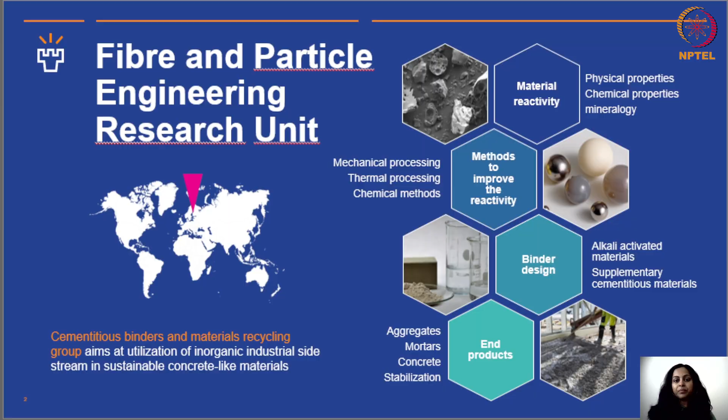Contents of today's presentation is about sustainability and circularity in construction, and then I will explain construction and demolition products, recycling concrete, and some pre-treatment methods already existing in this type of material. The main focus would be recycling fines, which can be in high value application or high volume application, which I'll explain in later slides.

And then we will touch upon the findings from these studies and what could be done as next steps.

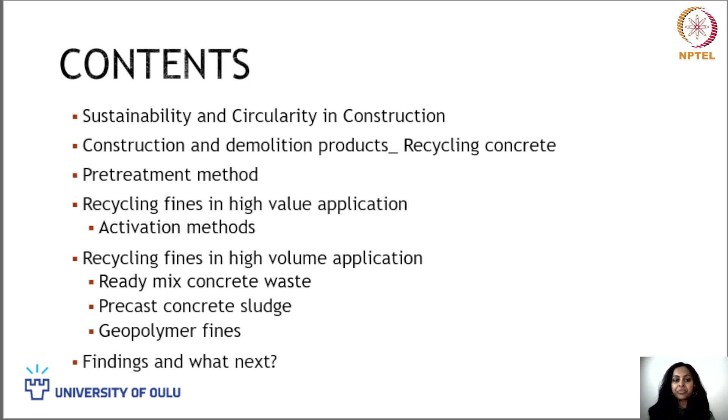When we consider sustainability and circularity in construction, it is heavily emphasized in recent days. Before going to the broader picture, let's see what it means in definition. Sustainability is defined as meeting the needs of the present generation without compromising the needs of the future generation. So it stands on three major pillars: economic, environmental, and societal.

In most cases, construction materials depend on natural resources, for example minerals mined, rocks, sand, wood, and so on. Creating sustainability in this kind of environment, when material is heavily dependent on natural resources, we should rely on the 3R principle, which is reduce, recycle, and reuse.

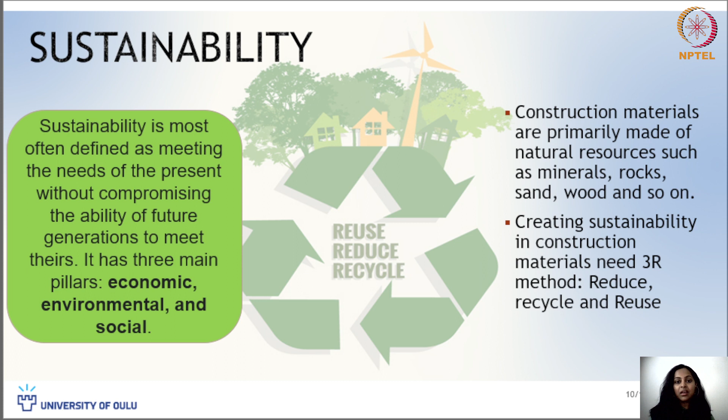Coming to circularity in construction, it is mostly defined by knowing the end of life scenarios. This picture shows how it looks for construction materials in recent days. If you consider steel on the right, you can see it is almost 93% recycled, 6% is reused, and only 1% goes to the landfill.

Coming to concrete, 75% is downcycled, whereas 20% is recycled and 5% goes to landfill. Considering timber, almost 58% goes to landfill.

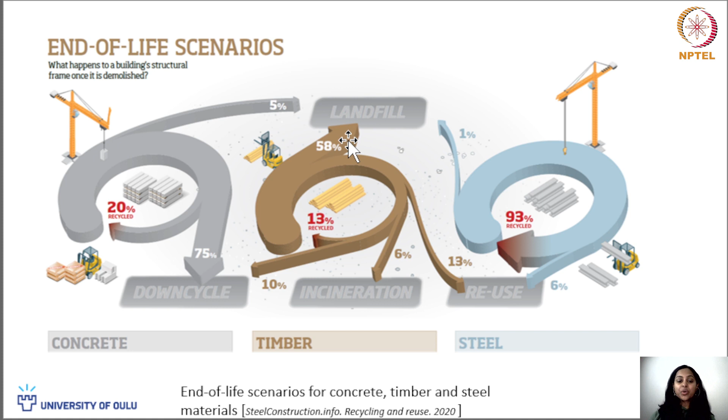So what we learned from the past generation is we had an abundance of resources, wherein 100% of raw materials were used from natural resources. We made buildings, and new buildings were formed also in the same way, whereas old buildings went mostly to the landfill, and we never knew how much material was reused, recycled, or recovered, because that was not the main criteria in the past, since we had enormous raw materials.

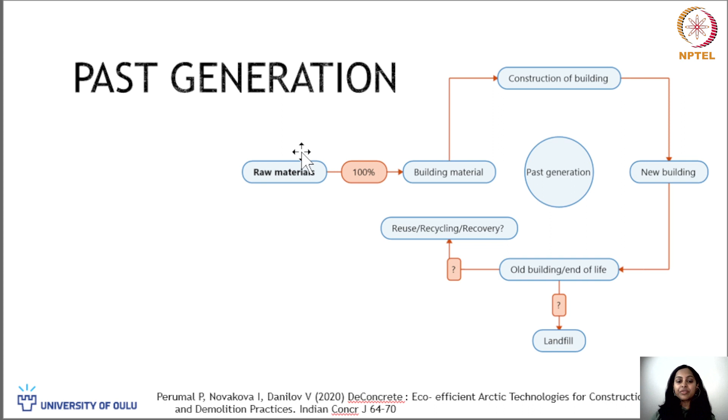In the present generation, when we feel the heat of so much natural resources already used in the past, and we need this sustainability to be maintained for our future generation to have their own resources, we are emphasizing so much on secondary raw material usage, which should be a minimum of 70% according to EU regulations, specifically the EU Waste Framework Directive, coined in 2008.

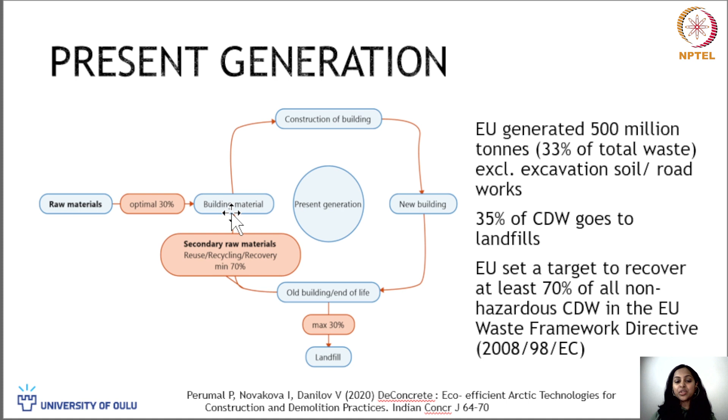However, 30% of raw materials is normally recycled into new buildings in the present situation. So what we see as our future is 96% of circularity in the construction industry. The European Environmental Agency has estimated 96% of all the mineral residues from construction and demolition waste can be recycled.

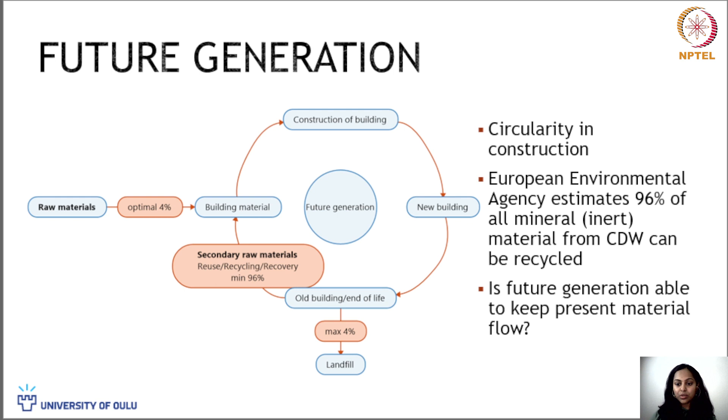So is the future generation able to keep up the present material flow? Considering also the need for infrastructure and increasing industrialization, this is a big question. Do we have enough resources for the future? Saying that, I would like to give an overview of the situation of construction and demolition waste in Finland.

Here we should also note that more than demolition or construction, there is a lot of renovation happening. So it is not necessarily all the time that we should focus on recycling or reusing. We can also think about reducing the use of raw materials, by extending the life of the buildings or the construction materials, and increasing the life of building materials, wherein we can reduce the amount of material that has to be used in future.

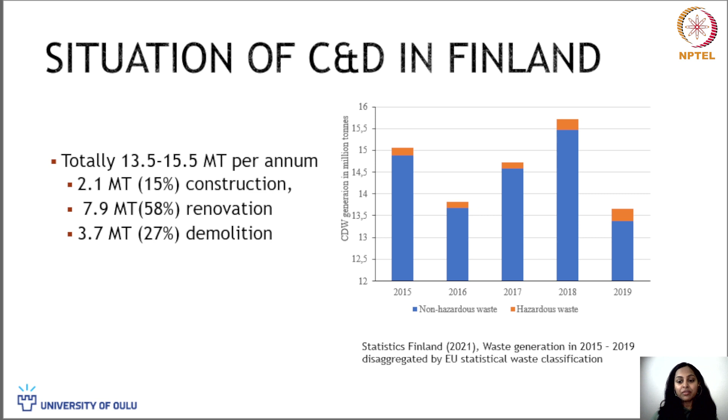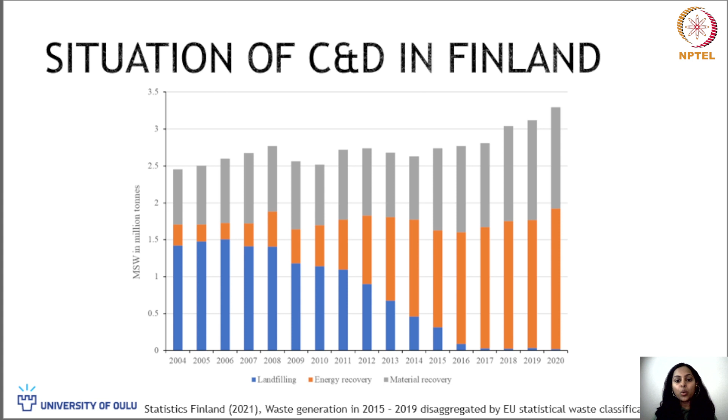The global cement production is 3.8 billion tons per year, and normally concrete has just 15% cement, with the remaining material made of rocks and sand. So if you consider it, concrete has sand, gravel or rocks, and also cement materials. And when you think about demolishing this material, you are also throwing all these resources into garbage, right?

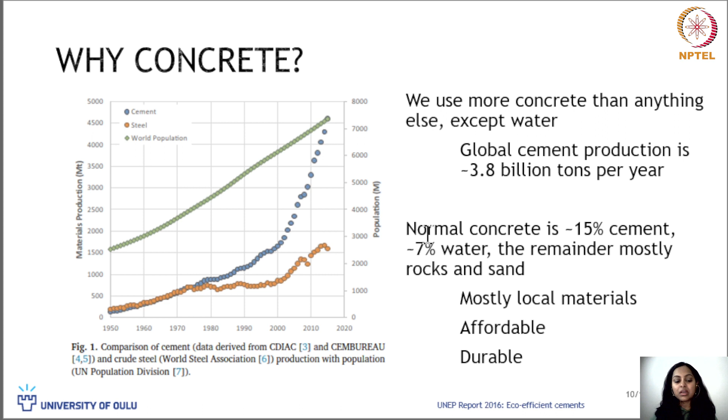This is why we are today talking about recycling concrete. I have also given a brief introduction to what ingredients go into concrete, like the sand, gravel or rock, and also the cement. So when you talk about recycling concrete, you will also end up with these materials, but in a bit different physical, chemical and mineralogical form, because of the reaction it would have undergone during the formation of the concrete material, or as it has undergone some wear and tear over the years.

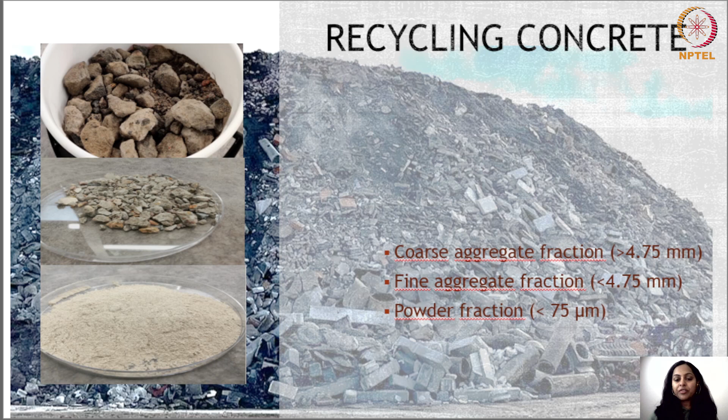Ideally, we should expect the same material that we put inside concrete as raw material: coarse aggregate fractions, which are mostly bigger than 4.75 mm in size, finer aggregate fraction which is less than 4.75 mm, and powder fraction which is less than 75 micrometers. Now we are clear about the type of material we could expect when recycling concrete from construction and demolition activities. So let's go one by one.

First, let's look into the aggregate fraction. Like I explained in the previous slides, we have the sand and the coarser material, that is rocks or gravel, that go into the concrete, which we call aggregate. Normally these days when you crush recycled concrete, the coarser fraction or the aggregate goes to an application like road subbase or earth construction, which is nothing but backfill application in several places, like an embankment or other such applications. This is why we call it downcycling, because for these applications you don't need the same quality of aggregate that was already used in the original concrete.

We can use several other materials for backfill applications or road subbase. So the intention these days is to upcycle this material back into concrete production. But why is this not possible at the moment?

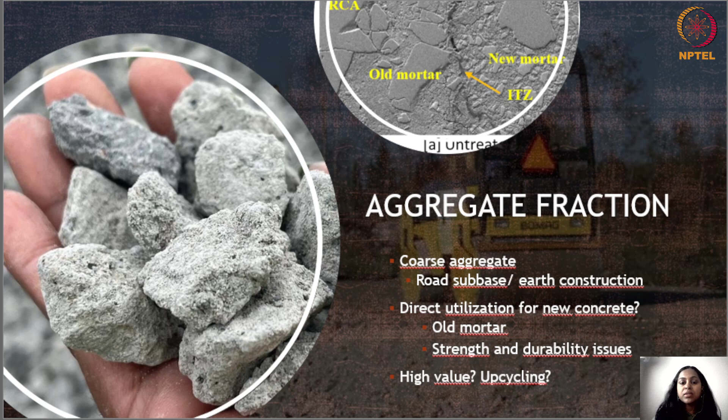Hence, the value of these aggregates is reduced and they are mostly used in downcycling or low value applications. So now we understand that this old mortar is creating issues for these concrete aggregates to be used in the production of new concrete materials.

There are several treatment methods proposed in literature, like mechanical treatment, where you abrade this mortar layer and remove it, creating better aggregates or stones. You can also do thermal treatment, where you apply high temperature, and the thermal expansion of the cement paste compared to the stone material is different, which creates a thermal shock, and the mortar layer cracks and falls off while the stone stays intact at that temperature. This also helps in removing the old mortar from the surface.

There is also chemical treatment, where you use acids to remove this old mortar layer. And there are some technologies in recent days like electrodynamic methods and hydraulic pressure using water, applied to remove the old mortar from the surfaces of the aggregate.

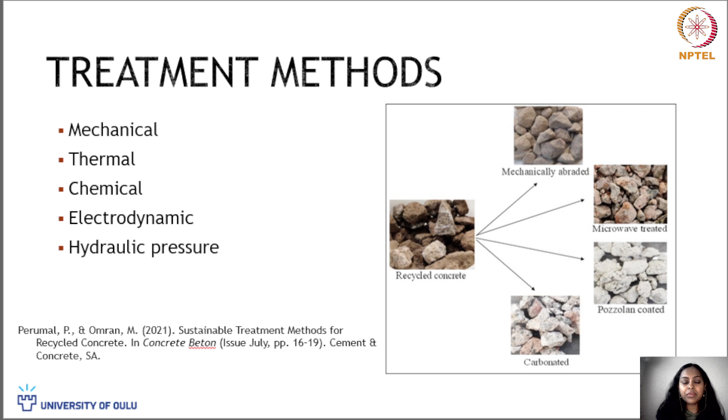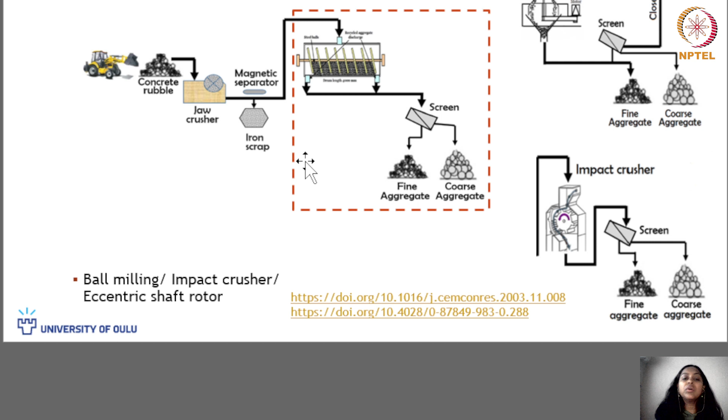There are also different crushers which could be used to modify the shape of the aggregate or the quality of the aggregate, like impact crusher or eccentric shaft rotor, and such crusher technologies that could also help in improving the material.

In thermal treatment, in addition to the crushing operation, there is also a rotary kiln heated at 700 degrees, which helps in removing this mortar material. The aggregates impact each other, created by hitting one another, which helps in removing the old mortar. Then this goes to the screen and is later sieved into different size fractions, where you now see a new fraction, which is powder fraction, less than 75 micrometers most of the time. So this is one such method.

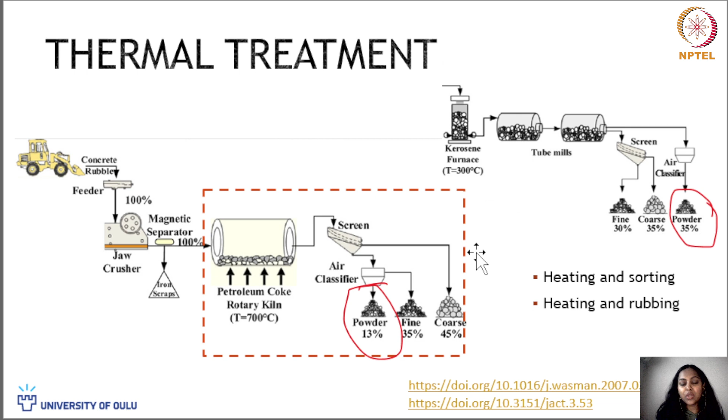So heating and rubbing, which creates impact by rubbing each other, and then heating and sorting, are some of the methods used to treat the aggregate to remove the mortar. These examples show that it is possible to further improve aggregate quality by treating them in different ways, so these aggregates can again be used in new concrete production.

However, we now know that these aggregates, the coarser and finer fractions, can be used back in concrete production. There is also this other fraction less than 75 micrometers, which is powder, expected to be cement powder, but during the course of crushing the concrete, some of the aggregate fraction may also be powdered and mixed with this fraction of less than 75 micrometers.

Moreover, these are hydrated cement, so these are not the actual cement that we mixed. It has been hydrated and is different in chemical and mineralogical composition at this point. So we cannot directly use them as a replacement for cement material. So what do we do with this concrete fines? This is the main focus of this lecture.

Like I said in the content slide, we will be focusing on both high value and high volume applications. In the high value application, I will go only with the literature studies, because there are numerous works happening in this direction. In high volume application, I'll show some results from my lab, where we try to develop applications to use high volume of this material.

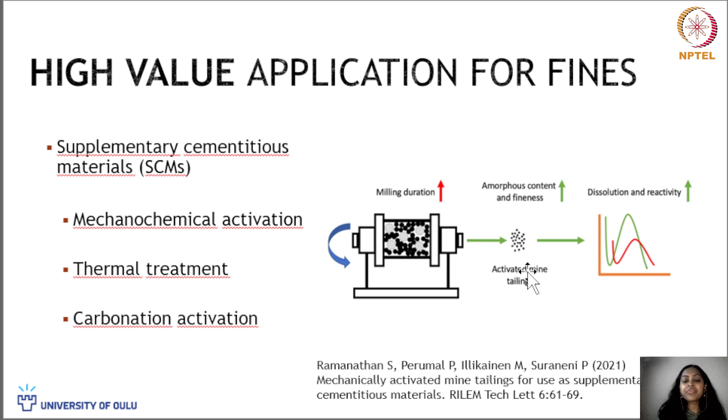There are several treatment methods already used for other types of material, like mechanochemical activation, thermal treatment, and carbonation activation. In mechanochemical activation, what you do is mill this material and make it into a much finer fraction, which also activates the material, because you are actually destructing the crystal structure or the mineralogy of the material, making it amorphous. So with the increase in amorphous content, this material also becomes reactive. This is the concept behind the mechanochemical activation.

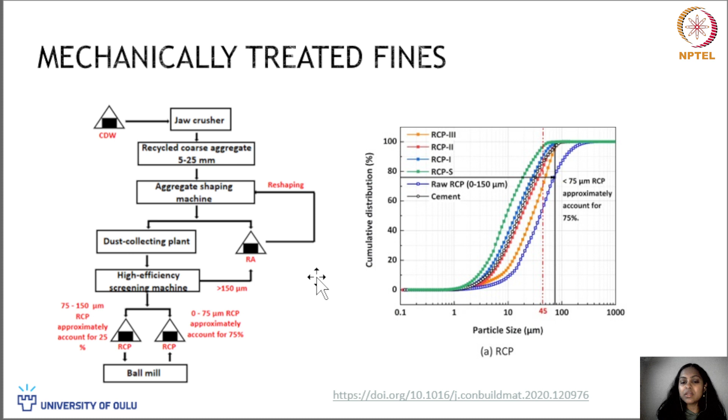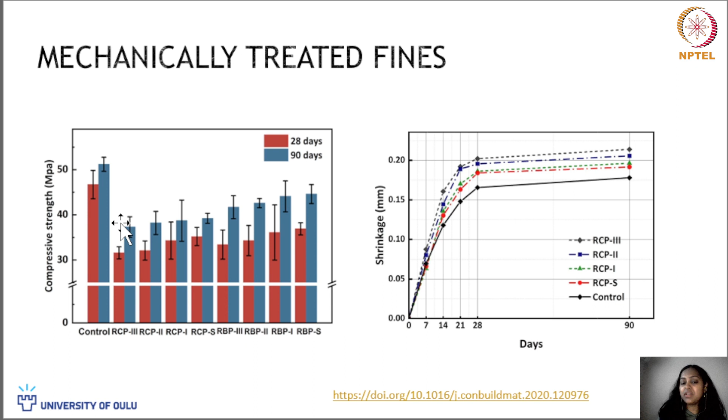However, when this is replaced with the Portland cement in these mixes, there is a decrease in the compressive strength. So it is still not equivalent in performance compared to the actual cement that we are using in recent days.

Next comes chemical treatment, wherein they're trying to use tannic acid. It is not necessarily tannic acid, but in this study, tannic acid has been used, where it is said to produce some submicron particles of reaction products that provide nucleation sites. So it produces more reaction products and fills the pores, thereby improving the properties of the materials. This is one study on chemical treatment.

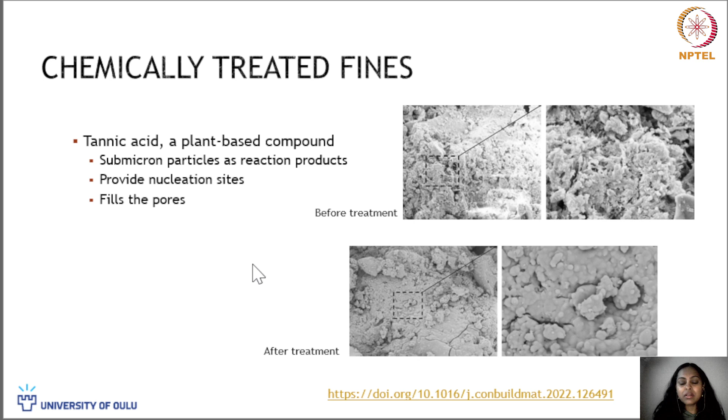When you consider thermal treatment, what we are trying to do is dehydrate those reaction products. When you dehydrate, we expect that it goes back to its original form of cement, so it becomes reactive. We can also assume that this reduces the particle size by physical disintegration when you thermally treat it to 400 to 500 degrees or even more than that.

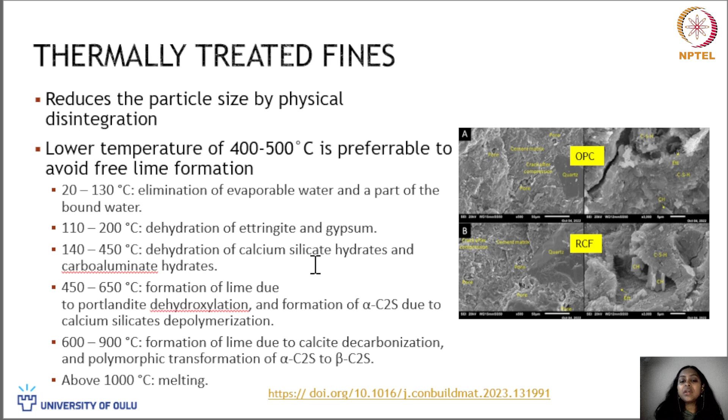It will eliminate the evaporable water and the bound water, and then it will dehydrate ettringite, gypsum, your CSH, and aluminate hydrates. In certain cases, it also forms lime due to Portlandite. Then dehydroxylation also happens at this stage around 600 degrees. So these are thermal activation methods by which we can dehydrate and produce reactive fine fractions, which can be used as a supplementary cement.

Another interesting way to make this material reactive is by carbonating them. There are several ways of carbonation that can be used, like wet carbonation, where you mix it in a wet condition, or semi-dry and dry conditions, and the efficiency of carbonation is said to be different in different conditions. Humidity and temperature applied together with carbonation also affect the efficiency of your carbonation.

But the final result that has been seen is that the calcium hydroxide left out in your hydrated cement turns into calcium carbonate. That's one thing. Another thing observed in the studies is that your silica and alumina become a reactive gel that helps in improving the reactivity of these carbonated recycled concrete fines, which then can be easily used as a supplementary cement.